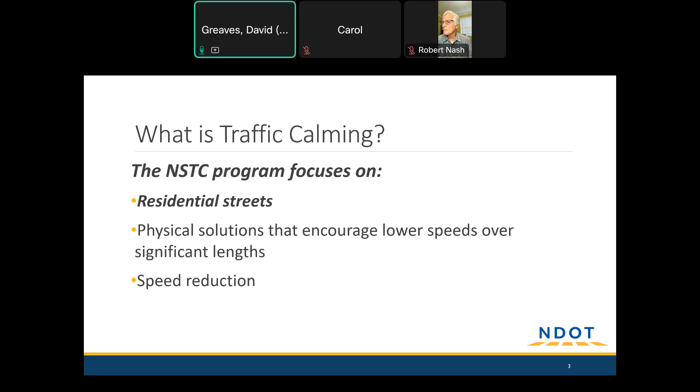So to jump into the program overview, traffic calming is a program that focuses on residential streets. We prefer physical solutions that encourage lower speeds over significant lengths. One of the primary goals of the program is speed reduction. I'll talk about the importance of that in just a moment.

The reason speeding is one of the primary focuses of this program is because it has a direct effect on safety, and Vision Zero is the initiative in Nashville that imagines nobody should have to be killed or seriously injured on our public roadways. Speeding ties into that because a pedestrian hit by a vehicle has a much greater chance of surviving if the vehicle's going 25 or below, versus 35 or 45 miles an hour. That risk goes way up as speeds increase. So in neighborhoods where we observe a good amount of speeding, we think it's important to do something to correct that.

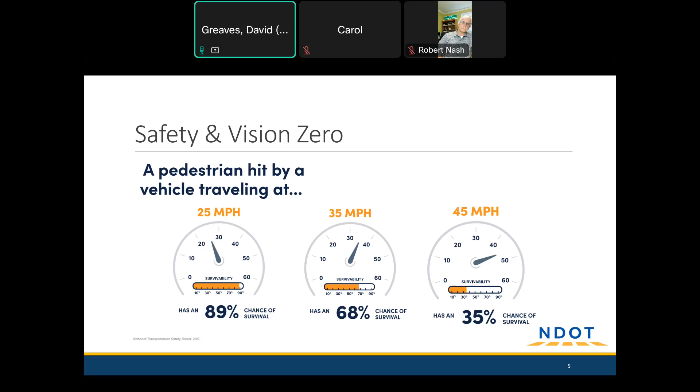There are a handful of things that the traffic calming program does design-wise - we'll talk about the tools in a minute - but there are also plenty of things that Metro Nashville does that are not traffic calming. So for anything we're not able to cover with a project like this, we want to make sure everyone is aware of Hub Nashville for things like requesting sidewalks, cleaning up litter, potholes, really anything Metro Nashville might do can be asked for through Hub. That can be accessed by calling 311, online at hub.nashville.gov, or with a mobile app.

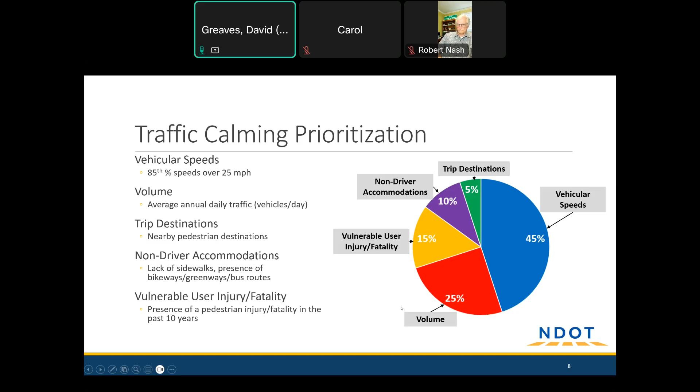I believe that Colemont scored points on all 5 of these categories, and we can dig into the details in just a sec. This project runs from Coleridge Drive, so kind of the corner with the elementary school, up to Keeley Drive. So it's just about 2 blocks. The cross streets are a little bit staggered, so it kind of looks like 3, but it is a relatively short length where we saw vehicles generally traveling around 29 miles per hour.

You had a relatively high volume of 2009 vehicles. And one of the weird things about Colemont is it's pretty wide for what it is. The width that we measured was between 36 and 37 feet. And that gives us a few options to talk about in terms of what sorts of design treatments we can propose.

This is a map of the project. So you see to the south, we've got Cole Elementary School, and this is just the segment up to Keeley Drive. This is a zoomed in shot of that live traffic calming tracker. So those turquoise lines that you see on Keeley Drive and Packard Drive are projects that have already been designed and are just waiting to be constructed. And then to the north, a section of Keeley, and I don't remember which road is immediately to the west, those are projects that have already been installed. So I'm assuming you're familiar with those if you live on this stretch of Colemont, but anyways, this is just to say that there are other traffic calming projects in your neck of the woods if you'd like to check them out in person.

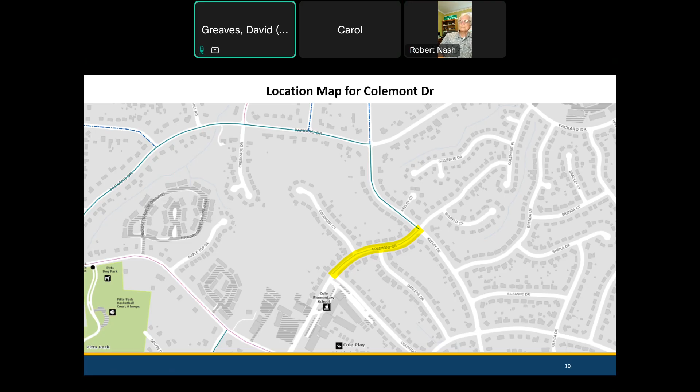In the traffic calming programs toolkit, the measure we use most often are called speed cushions. These are modular rubber devices designed to create a bump in the road as you drive over. They work similar to speed bumps, but with a higher target speed. We're looking for drivers to go at or around the speed limit, not slow way down to 5 miles an hour like you might in a parking lot.

These are about 3 inches tall. The 6 foot width is deliberate. The idea is that larger emergency vehicles would be less impacted than smaller private vehicles. They come in a variety of lengths depending on the situation. Here, we'd probably think about either 7 or 10.5, given the proximity to the school.

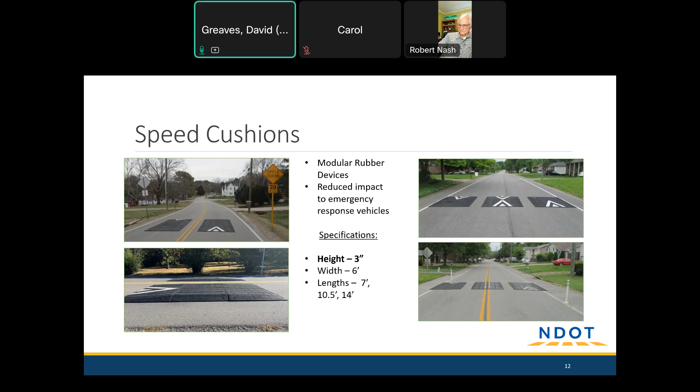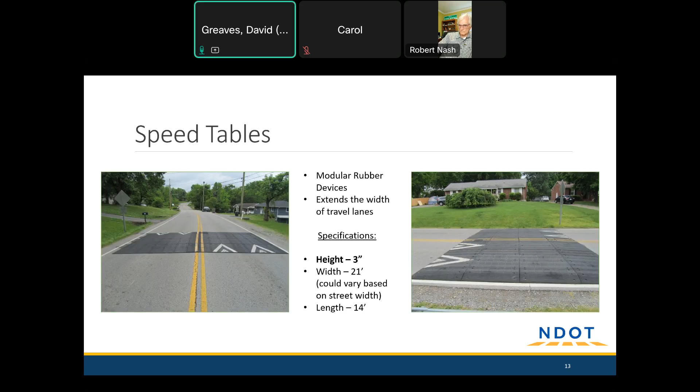Similar to those are speed tables. These work the same and are made out of the same materials. The only difference is they're significantly larger, so they don't have that benefit of reduced impact to emergency vehicles. On routes that we expect might provide access to other neighborhoods, we tend to avoid them, but they're also something you may see around Nashville.

We generally favor these physical solutions as a core part of a traffic calming design because we know they work well in achieving the program's goals. What we're looking at is results from a study conducted in 2023 that saw the average speed come down from 31 miles an hour to 22 miles an hour.

And the 85th percentile speed came down from 37 to 25. If you don't know, 85th percentile speed is the number where 85% of those measured were going that speed or below, and 15% were going some amount higher. We were pleased with these results, and we definitely expect to see more going forward, but generally this is why you see so many cushions on traffic calming projects.

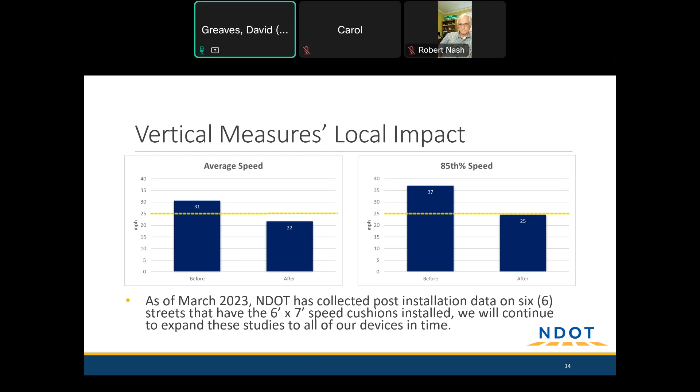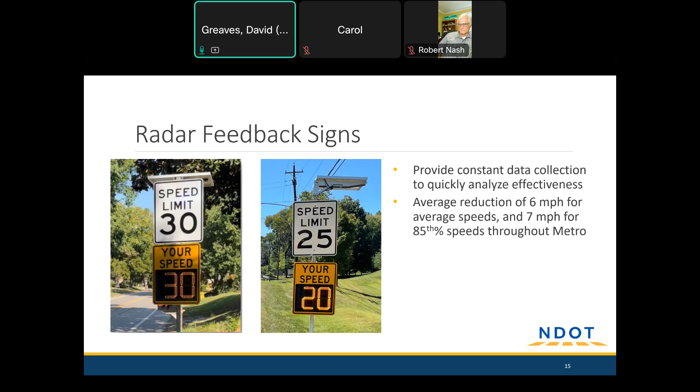This sees an average reduction of 6 miles an hour. So they don't do nothing, they have an effect, but they're not quite as mandatory as vertical physical measures might be. So we tend not to rely only on these if we can avoid it.

On wide roads, such as Colemont, we often consider pavement narrowing. When we have a lot of pavement to drive in, that can subconsciously induce higher speeds. People generally drive at the speed that they feel comfortable going, and when you have more room to work with, you feel comfortable going faster. So when we narrow roadways with white edge lines, that induces slower speeds just by making the roadway feel a little more claustrophobic, and thus people tend to drive a little more carefully.

In areas without sidewalks, it can increase the comfort for pedestrians because you have a defined space that you can walk in and generally expect that vehicles might not be driving there. It's certainly not a sidewalk, and it doesn't physically prevent vehicles from crossing lines, but they do help organize the space a little bit in those circumstances.

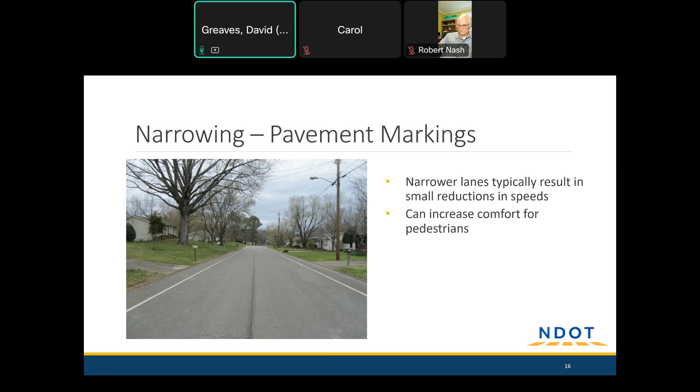Similar to pavement narrowing and applied to intersections, we have something called bulb outs. Where we have intersections with a lot of pavement and large turning radii, like the curve that connects the two streets together, we see vehicles are able to take turns at much higher speeds. That can be treated by shrinking the corner radii and narrowing that pavement, like you see in the image in the top left.

That has a few benefits. It does reduce those turning speeds, which gives vehicles more time to notice if a pedestrian, bicyclist, or another car is in their way as they're trying to make that turn. But it also shortens the distance that pedestrians have to cross to get from corner to corner. At the left is an extreme example, but you can see that the crossing distances were cut almost in half in those cases, because now you're just crossing those two lanes of traffic rather than that full 50 feet from ramp to ramp.

And on streets that have on-street parking and quite a bit of it, it can improve visibility by enforcing the existing parking code that says you're not allowed to park within 30 feet of a crosswalk. This just makes sure that people don't park so close to the corners that you can't see around them and look out for folks using the crosswalks.

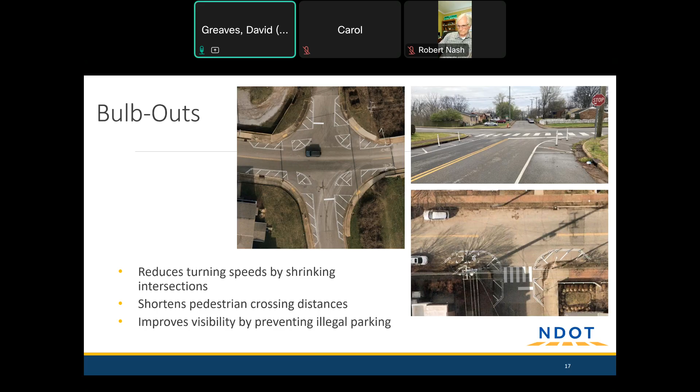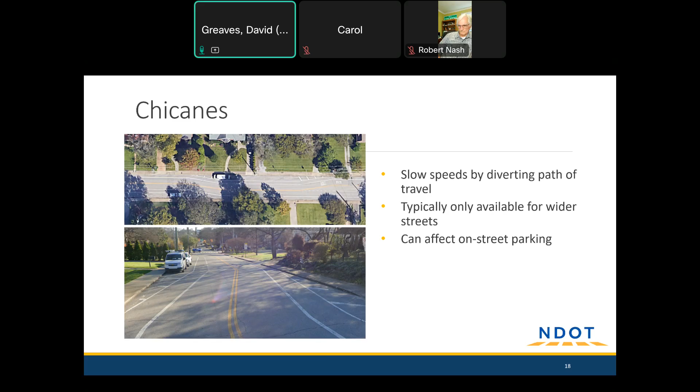We also do chicanes. This may actually work well for Colemont. Basically, on wide roads what we can do is sort of do that narrowing, but also zigzag the center line along the length. That forces vehicles to do some maneuvering as they're traveling along, and that reduces speeding because you're not able to go quite as fast. I'd say the major downside is it forces street parking onto one side or the other alternating, so it reduces the number of places street parking can happen, and we want to be extra sensitive to that when considering this treatment.

And then lastly, we have traffic circles. These are similar to bulb outs, but rather than narrowing from the outside in, it's narrowing from the inside out. This basically creates a small roundabout. It's not quite as designed as a roundabout might be, but it works the same way. We're asking drivers to make a counterclockwise turn around the circle, and that'll slow speeds just by forcing everyone to do that maneuvering.

And with that, any questions about what I've covered before moving on to look at our draft concept design?

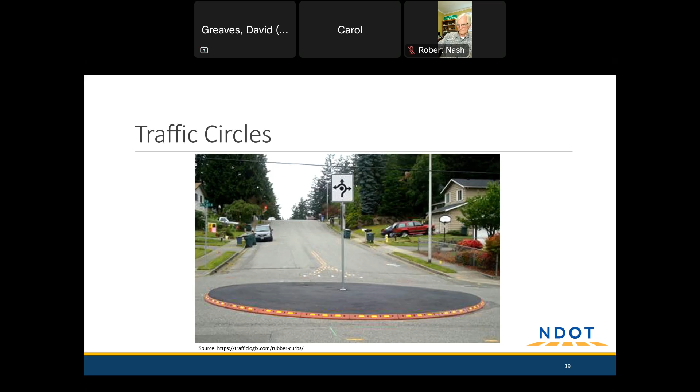I'd like to see your design. Awesome, so here's what we've got so far.

I'll start by talking you through it. We placed these cushions between 300 and 400 feet apart, which is the lower half of our range. We usually do that when we're looking for target speeds to be as low as we can get them. Being in proximity to the elementary school, and the fact that there's an uncontrolled crosswalk at the corner of Coleridge Drive and Colemont, we thought that was important to pursue, and we had room for three of them.

Now, having heard that you've noticed people doing donuts at the corner of Keeley Drive and Colemont Drive, and knowing both of those streets are relatively wide, I'm interested to hear your thoughts on bulb outs at the intersection of Keeley and Colemont, because that's one thing we could do to make it a little less of a sea of pavement available for reckless driving like that.

Any questions about this? Do you have other ideas, things you'd like for us to consider while we do our site visit and think more about the design?

I think that the speed cushions are a good option. Got it. I would also think the bulb outs would be good at that intersection too. Yeah, I'm kind of thinking the same. Usually intersections that have donuts happening on them, that's kind of an indicator we should think about that.

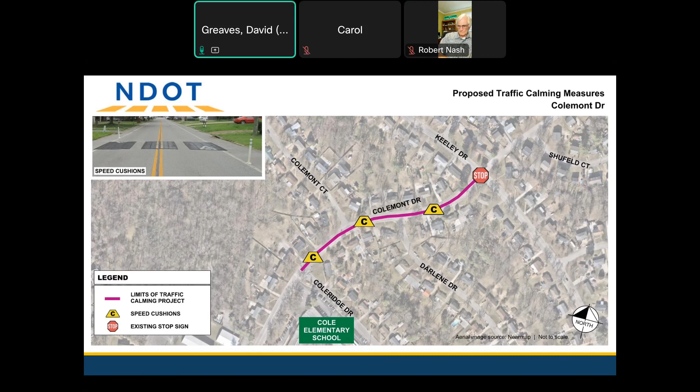Awesome, well yeah, that all sounds good. We've definitely got a lot of things to look into. That's a good segue into our next slide, so this is a flow chart of how all traffic calming projects proceed.

Like I mentioned, this started with an application from residents. We then did our prioritization and selection exercise, studying all the streets that have applied and choosing those most in need. The red circle neighborhood meeting is where we are tonight.

So next up is we need to do a field review, so we're going to go do a site visit and check out Colemont in person. I'm also going to have some conversations with my partners to see if this project might be extended due to the school, and then look into some of those design options that we just discussed.

Once we've got a design done, we can either schedule a second neighborhood meeting to review and take a look at what we came up with and anything that may have changed. But we can also post those plans online and move forward with the online ballot.

So basically just skipping the second neighborhood meeting and deciding whether or not the project is wanted. After the ballot, should 66% of people who vote vote in favor, the construction project will begin once it reaches the front of the queue.

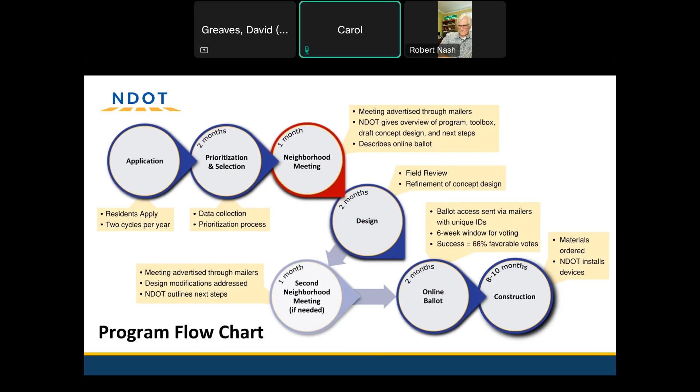Is it possible to have a postcard sent again for the online ballot? Yes, so I'll skip to this next slide. When the ballot starts, we kick that off by sending a postcard to the same group of people that received the invitation for tonight's meeting.

And then that includes a unique ID, so we'll have on there the street name, the date that voting closes, and then the code that you'll plug into the form that makes sure the votes that we get are the ones that we expected to hear from.

I think as long as we can review the plans online and then have access to the ballot voting, and the postcards are very helpful—by the way, thank you so much for sending those. I think that would suffice. I don't think that a second meeting would be necessary.

Okay, well yeah, that works for me. We can make that the plan, and if I hear otherwise, then we'll let everyone know.

So that ballot period is going to be open for around 6 weeks. You get to vote yes or no, and like I mentioned before, it's 2/3 of respondents voting yes that means a project has succeeded. So it's not 2/3 of every single house, it's only if you vote.

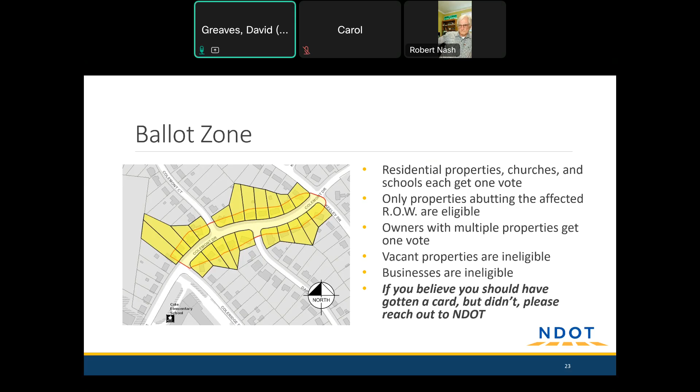And that pretty much is it. Do y'all have any more questions or thoughts? Anything to express before we wrap up for tonight?

No, I'd just like to thank you so much for your time and for planning this and for making sure to include the community in it. Yeah, of course, I really appreciate y'all's time spent letting us know how we can make this a successful project. So I appreciate you joining here tonight.